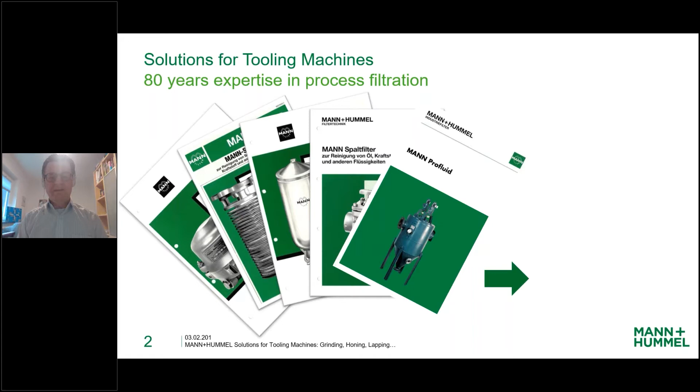Here you see some old product brochures. We started with centrifuges, with sieve filters, multi-cyclones, gap-type filters, or even the well-known ProFluid system. But now we are in a new era. We are now focusing on filter elements, the so-called ProFluid Plus system. It's a best-in-class solution for liquid filtration.

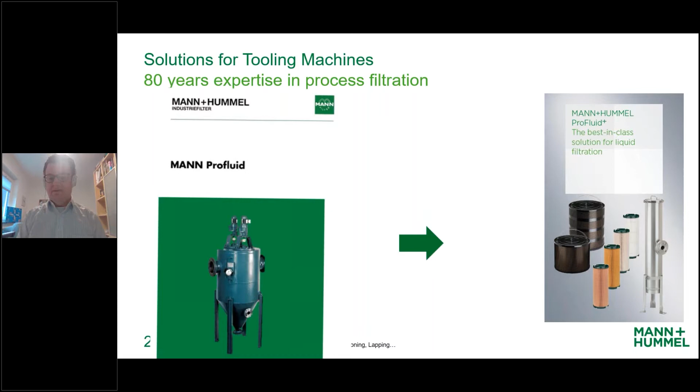Let's start with the base of operations. So if a customer needs filtration, we are usually confronted with three different topics, depending on the process of filtration. So at first, we are confronted with a wide diversity of lubricants. That can be synthetic oils, mineral oils, standard cooling lubricants, or even special designed lubricants with special additives the customer finally needs.

And as well, we are confronted with different viscosities. From viscosity 1 centistoke next to water, it goes usually up to 19 centistokes. Most times it's not higher in the processes we are looking at today. And this is as well one of the leading factors for finding the right filter element for your process.

The next point is the particle sizes inside the loop. So in the grinding process, you will have particles from size 20 micron up to 80 micron. To get an idea how big or how small this is, a human hair usually is between 50 and 70 micron. Then we have the honing process. It's a little bit finer. Here we have particles from 40 micron going down to 10 micron, or we go to lapping with 2 to 20 micron, or ultrasonic grinding, even a finer process.

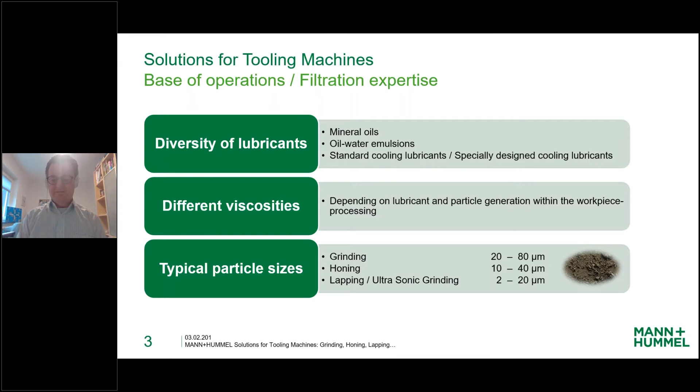Now I will show you two technical slides to get an idea how we recommend our filters for your daily usage. So here you see two axes. On the y-axis, you see the filtration efficiency. It starts with 50 on the left lower edge. And here on the x-axis, you see the particle size.

So we recommend usually two flow rates. I will explain it on the example of PF34, one of our filter lines. We have the optimum flow rate we recommend, which is in this example 25 liters per minute. And we have the maximum flow rate, which is 100 liters per minute. What I want to show you now is how this finally works.

So if you look on the left, here you see the efficiency of 50% for particles around 6 micron at the maximum flow rate. That means for you that half of the 6 micron particles are filtered when you use the maximum flow rate we recommend, which is 100 liters per minute.

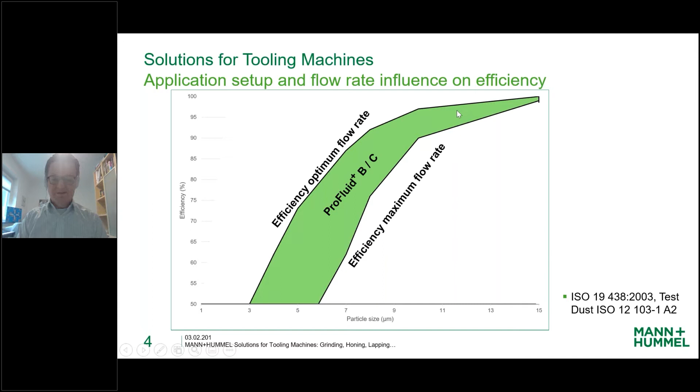Then we have other filter elements in two product lines, the so-called ProFluid Plus M, which are used in lapping and honing processes. And as well, we have the ProFluid S and T, which is really the state-of-the-art product with a Teflon filter media. And you can backflush our PF15 elements, I will show later.

And everything is measured with a multipass test. That means we count the particles in front of the filter and after the filter. And here we refer to ISO 19438.

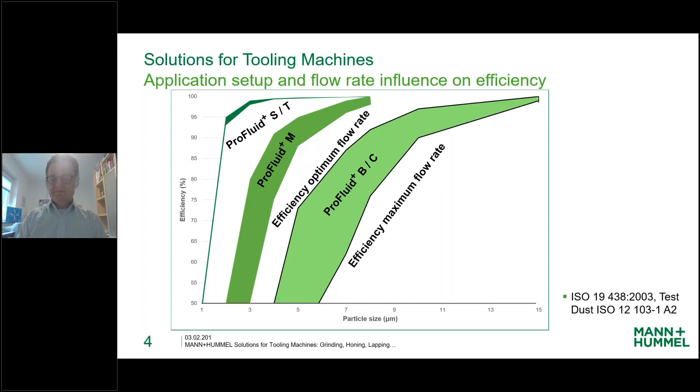Next slide. Here I want to show you the influence of the flow rate on the dust capacity. Dust capacity means how much dust you can store inside your filter media. Looking at the low line, ProFluid Plus B, when you use the maximum flow rate we recommend, we can store only 20 grams per square meter of dust. But if you use the optimum flow rate, it will be triple this value. So here we are at 60 grams per square meter. That means the slower the flow rate is, the more dust your elements can capture.

But finally, it's a decision regarding your volume of loop, and also a decision regarding invest, because if you use a filter element with 100 liters per minute, you only need one, but if you use the optimal flow rate, you need four times this filter element, but then you can use it much longer. So it's a question of invest as well.

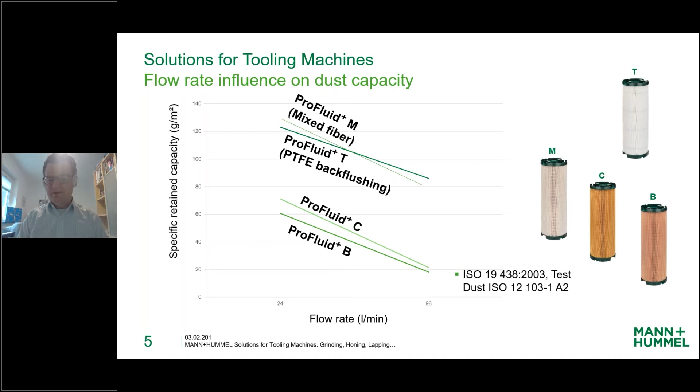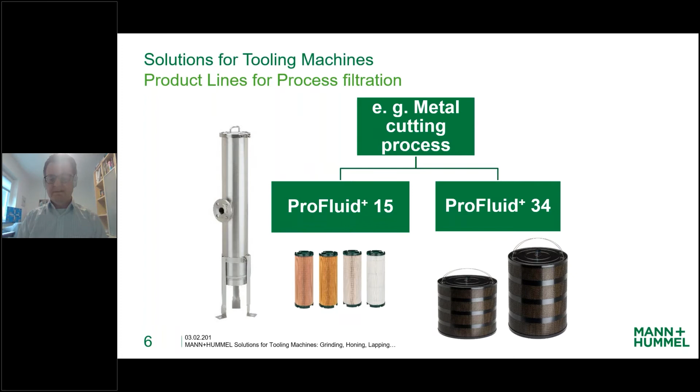So ProFluid Plus 15, the name comes from the diameter of the filter element. The diameter is 150 millimeters, and the filter elements are 410 millimeters in height. So flow direction is outside to inside. As well, we have backflushing filter types or filter media, our Teflon media.

And the specialty here is all the PF15 elements are made in Germany with fully automatic production. As well, we use glue-free end caps. And we do this in a manufacturing process with infrared welding. That means you don't have glue inside your lube, which you don't want.

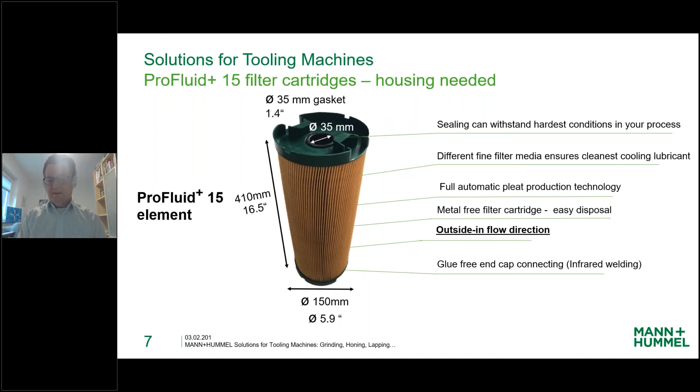Next slide gives you the complete overview of the PF15 range. On the top, you see the usage level. You can use our elements with flow rates optimal 25 liters per minute, maximum 100 liters per minute.

So on the top we have the ProFluid Plus B and C, two different kinds of cellulose media, but then it goes finer to mixed fiber, which means a mixture between cellulose and Teflon, and synthetic media. And the finest media is a Teflon filter element, which is used for backflushing usually.

As well, you see the service life. We measured everything with the same dust load. So this gives you an idea about the usage time. One of the USPs is the big filtration area we have if you compare it to filter candles or even bag type filters.

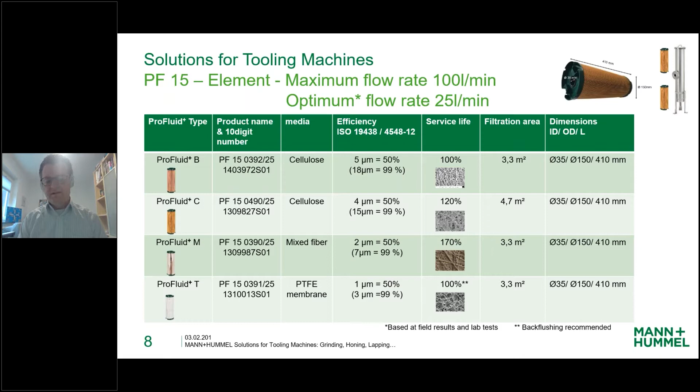As well, we have a stainless steel housing for these elements. It's a two-stage housing, and it's made for operating pressure up to 7 bars, and you can combine our housings with some piping.

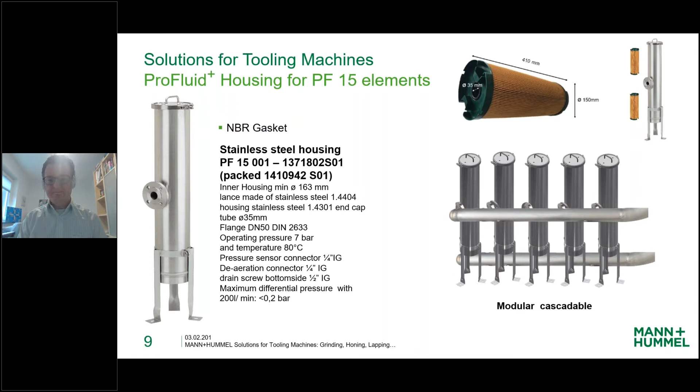Now coming to the next product line, PF34. Again, the name PF34 comes from the diameter 340 millimeters, and this product line is available at two different heights, at 450 millimeters and 300 millimeters.

Here, the flow direction is the opposite. Flow direction is from inside to outside, and you connect these filter elements with a so-called Camlock adapter. If you don't know what this is, this is an industrial system similar to Gardena couplings you probably use in your garden.

As well, the elements can be used for pressure differences up to 3 bars, and the dust is caught inside this metal, I call it housing, or black painted metal. So it's a really clean service when you change the elements.

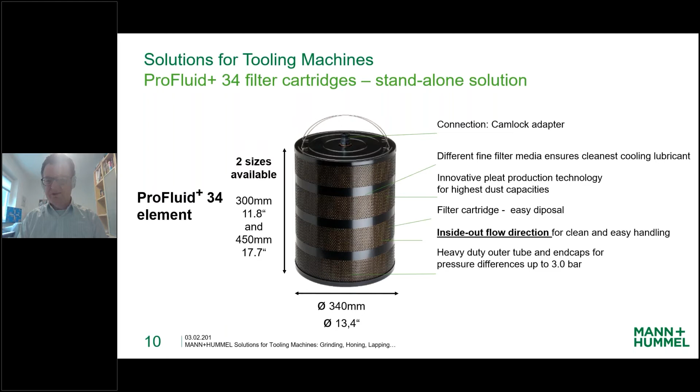The good thing on this system is that you don't need in every case an external housing. Of course, many customers put these elements in a housing, but it's possible to use it as a standalone solution. You only put the elements on a metal grid, and the filtered lube is coming out of these filter elements and flowing down through the metal grid into an oil sump.

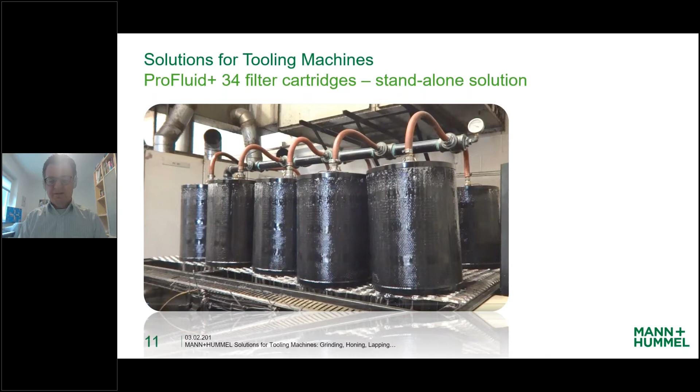So it's really a competitive solution, which is often used for retrofitting. As well, we replace some smaller pre-coat filters here, but there are many other use cases as well. Okay, again, the overview of the product range. Here, 4 different types depending on your process again. But finally, it's 8 types because of the 2 different heights.

And what is really interesting here is if you look at ProFluid Plus C, for example, you have 25 square meters of filter media area. That's best in class. I've never seen this at competitors. So here you can replace many filter elements, or if you replace even bag type filters, it's 50 times as much.

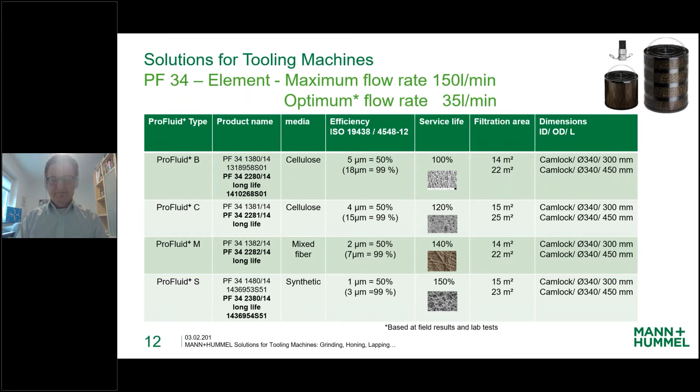Okay, going to the next slide. Now, finally, all the product benefits we have. You will have shorter and faster machining times. You will have better surface qualities, lower tolerances. You have a clean and user-friendly service. You will have less downtime of your complete system.

You will have less oil loss, which costs a lot of money, less maintenance costs, less wear and tear of your toolings, even less disposal costs, and a longer usage of your fluids. Finally, it's really a cost-efficient solution.

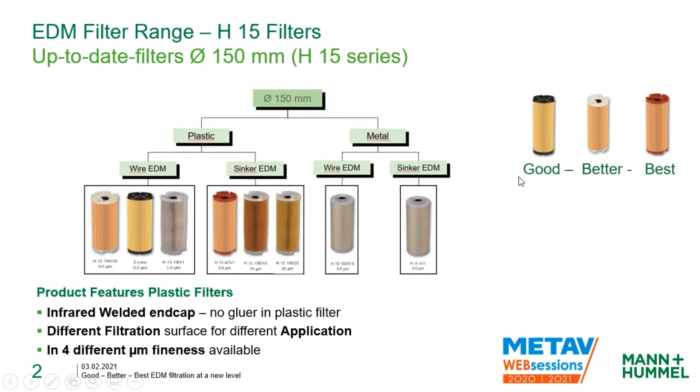Out of the experience we have over so many years with our H15 product line, we have now developed our new H34 series. The H34 series is very important for many EDM machines coming from Japan and Asia. Also a lot of the machines from GF Machining Solutions now use these big filters. So for the future, the H34 filters will be more and more available in the market. H15 filters might not disappear completely, but there are a lot of advantages of the H34, and it will be focused on more and more in the future.

Because, as Markus already mentioned, it's inside-outside, so we have the dirt inside. It's easy handling and easy service. Quick connectors also allow you to take the filter out of the machine very fast instead of opening many housings. The dirt is inside, as I said, and we can go up to 25 square meters of filtration area, so with one filter we can capture a lot of dirt.

And here also we designed the so-called good, better, best program. Going first on the right side, best. So we developed a so-called triple bellow filter with synthetic media, 1 to 2 micron. And this filter is today used also on Seibu and Makino OE machines, which means all these machines are coming today even with that filter in the global market.

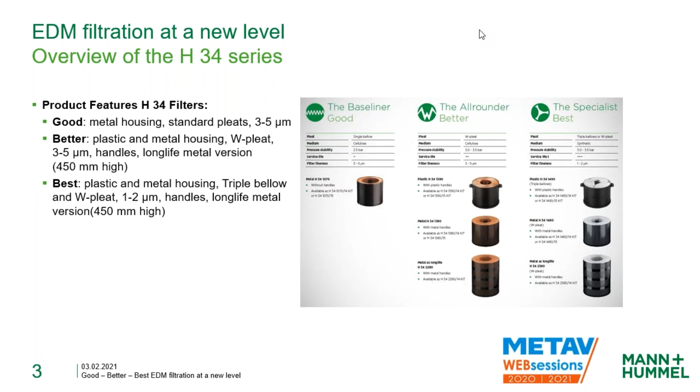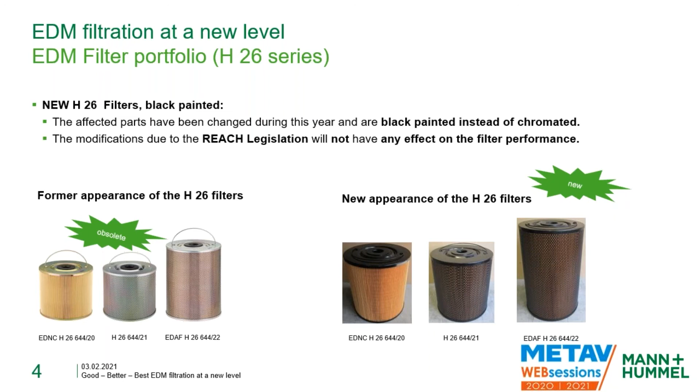I already talked about 150 diameter, 260 and 340. In the case of 310, I want to highlight that we introduced a new filter, which is also a good, better, best program. H31 is mainly for Taiwanese machines. In the past, we only had the standard H31 1033 with 10 square meters. Now we have a 1680, which we call better, and this is 17.4 square meters. So we increased the service life or the filtration area by 70%.

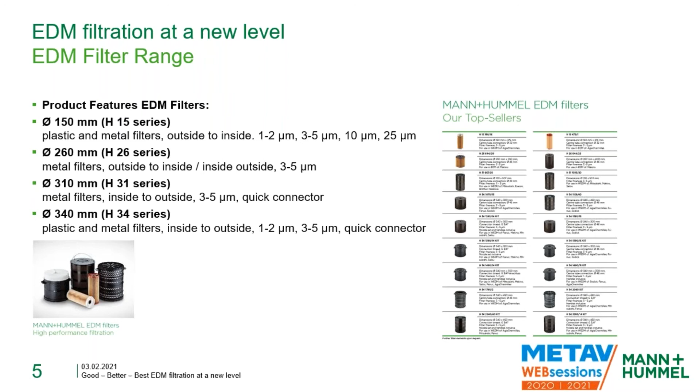And now we are in the final stage to introduce our H31 7080 with a synthetic media. So this is very new for us. Now we make the first samples for that application, but we want to introduce this synthetic filter mid-year, and it will then for the first time also have the 1 to 2 micron synthetic media inside.

Finally, my last slide I want to show is our production network. We clearly made our production strategy in such a way that all the plastic filters, whether H15, Pf15 or H34 in plastic, are all produced today in Germany. So all these filters are made in Germany. And in the case of metal filters, we have two locations, one in China and one in India. These filters are produced in Asia today.